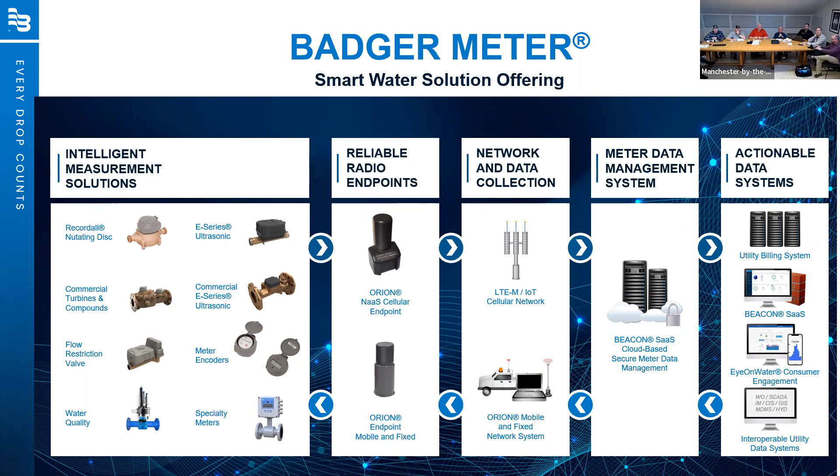Awesome. So we'll run through this really quick. We'll go back through some introductions on what we're talking about, and then show you the actual system, you know, with the customers using it, what it does for them, what it can do for you, and what it does for your residents. So this is kind of a vision of the portfolio of what Badger Meter has to offer. We went through introductions. There's a little lag here.

When it comes to meters, Badger - that's what they started as, a meter manufacturer. They make a very good mechanical meter to this day. It's a nutating disc, low lead bronze meter, largest chamber in the industry, so it's less wear and tear over time. It's our workhorse, we call it. It's been in the field since 1972, and they still make it today.

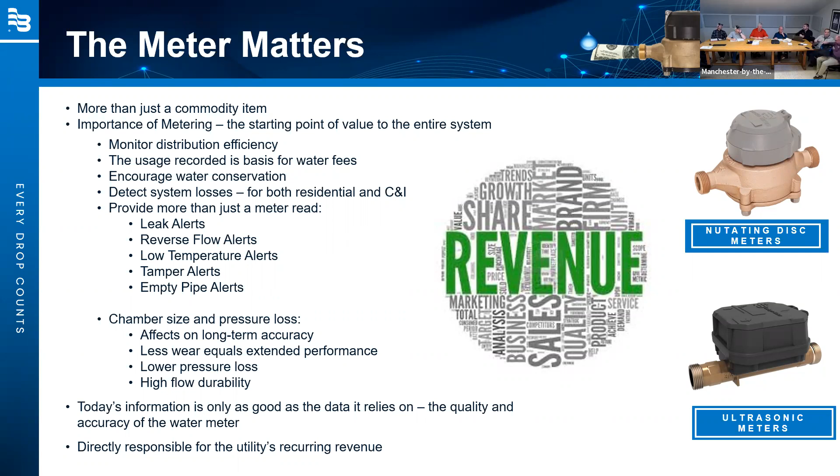You can pass it out if you want. Not a huge deal, but it's oversized chambers, what makes it different from other meters that you may see out there. The big improvements, I guess you should say, that they've made to it is when it comes to the registers that go on top of the meter.

Probably seen something like that in your basement - traditional bronze mechanical meters. So the register that this gentleman here is holding, that's kind of what we've done to bring up that meter to these newer AMI 2023 systems. A lot of customers still like the mechanical meters - you can rebuild them, if they freeze or fail, simply bring in a central meter, very affordable just to rebuild it. The meter itself is affordable and it's very accurate, very robust. But to kind of bring it up to speed with these newer AMI systems to get you different alarms and features, they've added that to the register.

If we put that register on the meter, you'll get a leak detection notification. If there's a leak in someone's home, it'll send a notification through the register. You'll also get a backflow removal alert, so if someone actually takes it off to fill a pool or steal water, it's put back on, it'll alert you of that. It also has a temperature alarm for ambient temperature around the meter register head. If it gets down to 39 degrees, you get an alarm back to the system.

So just taking a few things that we're missing with mechanical meters and introducing it to it. They do make a mechanical register as well, you just won't get the extra bells and whistles. Same price, same cost, just a couple more features. People happen to like mechanical, so we have both options.

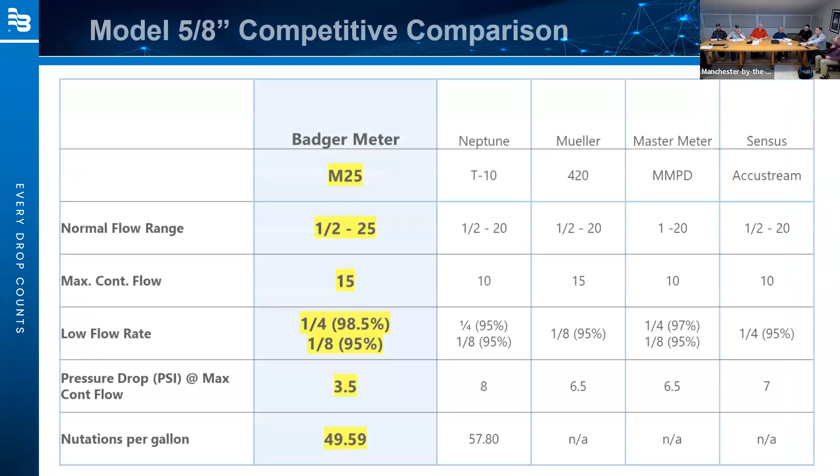I'm skipping ahead, it'll take a minute for it to catch up. I can send this as well so you can see I have all the specs, the low flow capabilities. When you're looking at residential size meters, you worry about that low flow capability. The lower it is when it starts registering water, the better, more revenue for the department and it catches leaks sooner.

Skip ahead. The other style meter we have right here is called the ultrasonic meter. This one was introduced by Badger in 2009 in North America. It's been used for probably 20 years before that overseas in Europe. It's growing in popularity right now, so it's important that we mention it. It's a full line of ultrasonic, from 5/8 inch, your residential sizes, up to 8 inch currently, and it'll go up to 12 inch hopefully by next year.

The difference between the two meters you're looking at is that one has mechanical parts. This one does not, it's using ultrasonic transit time technology to measure the water going through the meter.

Sorry, I'm very naive about it. So how does the bronze one measure water?

That one has a nutating disc inside it, with an actual chamber inside. There's a disc that nutates, or wobbles, around an orb, kind of like a penny spinning on a table. It separates the chamber into two sections, so as one chamber is emptying, the other is filling. It counts the nutations, or wobbles, as the water spins it. On top of it, you'll see it actually moves a magnet, and that's what connects to the register. So there's actually no wires between the register on top and the bronze meter itself, it's just the magnet spinning. The nutations, the wobbling of the disc, tell it exactly how much water is on one side, and it transfers that to the other side.

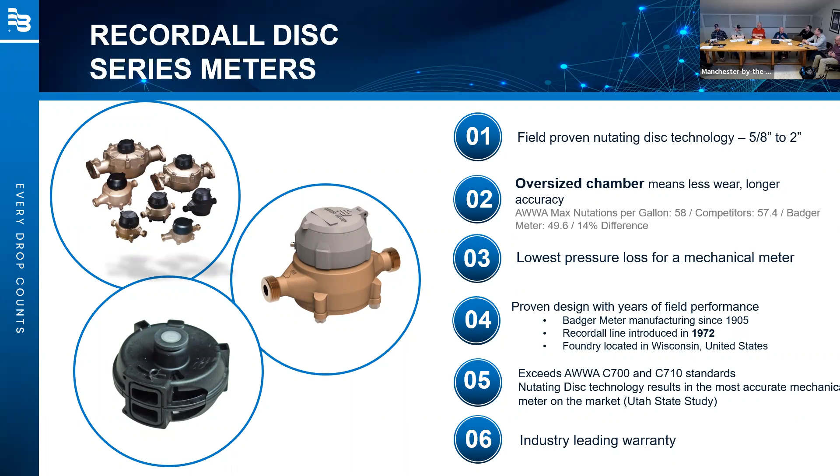You have to factor in also your time—the time of the truck roll to go out there to pull the meter to rebuild it. So a lot of people, if you look at the whole picture, if it freezes, you can rebuild it on site, but do you want to get into a full meter rebuild in 15 years? You probably don't. 20 years, you probably don't. You're probably better off replacing it if you add up all the small expenses.

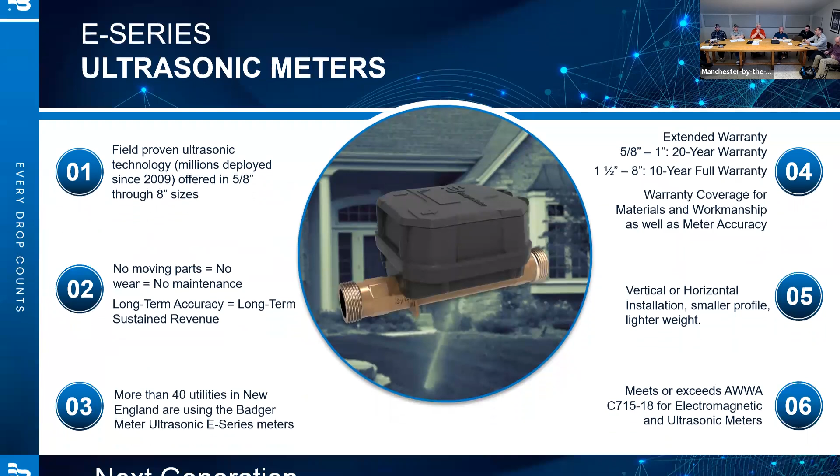The truck's still got to be out there to replace it, or it's really just a plumbing issue. Usually the rebuild comes when it freezes or when there's an issue with the meter or you don't trust the accuracy. In terms of like year 21, when we're going to do another project, you don't see towns going and rebuilding a couple thousand meters. At that point, they're replacing with just a new meter. But between the first year it's in and 20 years, they'll definitely rebuild it as things break, or as debris gets in it and it stops moving, or it freezes.

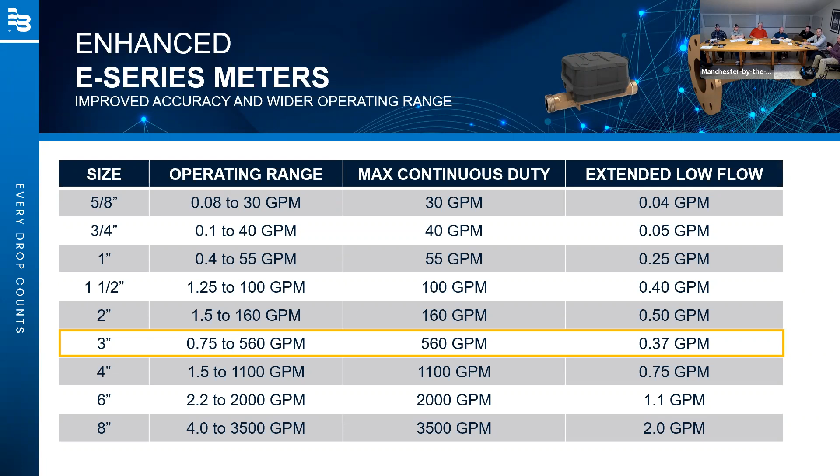Do you guys currently rebuild now? Most towns are going away from rebuild. So the cost to rebuild a meter, when you look at all of it—all in—is typically more than what it would cost to do a replacement. We can give you references of people who have done studies on site, and that's what they find. So it's usually a non-topic once the number comes out.

What I'll do is send you a simple breakdown, pluses and minuses of both meters, as you can see—what you lose, what you gain, that sort of thing.

So the rebuild, that's a high skill level deal—you guys have to do that? No, you can do them in-house. Is that right? Yeah, our guys have done it in the past, but it's not something we typically do.

When one of the meter freezes, meter bases—what you're looking at with the brass, that's just a meter base. That's relatively inexpensive, so at this point, this day and age, if it does freeze, sometimes we'll just replace the chamber, about $20, and put it back out there. But in terms of a full rebuild of like 1,000 of these, at that point they'll just put a new base.

When you say freeze, where are these meters sitting—outside the house or in the basement? Most basements, but you do have people where the heat goes out, or the customer's away, and we had that cold snap a few weeks ago.

I think they replaced about 30 of them. They have a lot of houses that are on pillars and stuff, and the insulation's not great, so the numbers are probably a little higher. We've definitely had further lines in town too, where just something happens and it freezes. And then this slide compares the low flow accuracy.

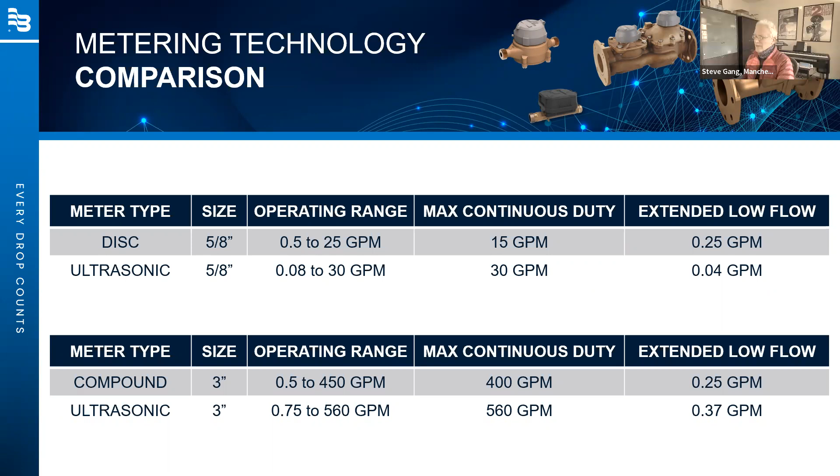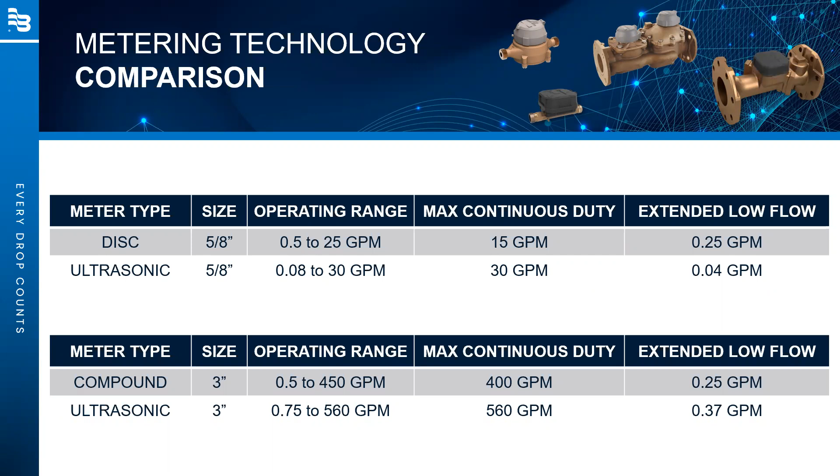Yeah, sorry, Ron Master Giacomo. Just a question on the installation of the meter. Is there a minimum straight run you need on either side of the meter? And is that an issue with installing these? Great question. So ultrasonic does have requirements for the large meters. It's 5 times the diameter of the pipe. So if it's a 3-inch meter, you're going to need 15 inches of straight pipe before and after the meter. The great part about ultrasonic is you don't necessarily need to put a strainer in line because there's nothing that can clog the meter. So a lot of times towns will just pull out the strainer, give them a little bit extra, but yep, it's 3 times or 5 times the diameter of the pipe.

For residential meters, you don't see a need for anything, you can just install them as they are. There's always enough room to do that. Some large meters may have to be replumbed, but typically it's not common. Go ahead, Ron. Are they inside the house or outside the house when they're installed? It would be inside the house. I don't know if you guys have any pit installations, but there are cases where a large meter would be in a pit. So, yep. Places like that, all over.

Are your AMI transponders inside or outside? Usually they're outside. We do have some manual ones. So you're always going to benefit by putting the transponder outside. It's easier for the town to get in and change it later. You don't have to make an appointment. You can walk up and just swap it out.

And going back to what we were talking about before in terms of what towns are choosing these days, they're having us get proposals to look at the cost of each. I would say the majority recently are going with ultrasonic. A lot of legacy customers are sticking with mechanical for the smaller ones, ultrasonic for larger ones. When you say larger, are you saying above 5/8? Or is 3 inches the cutoff, or an inch and a half? Usually inch and a half and larger. I would sometimes start at 1 inch. Yeah.

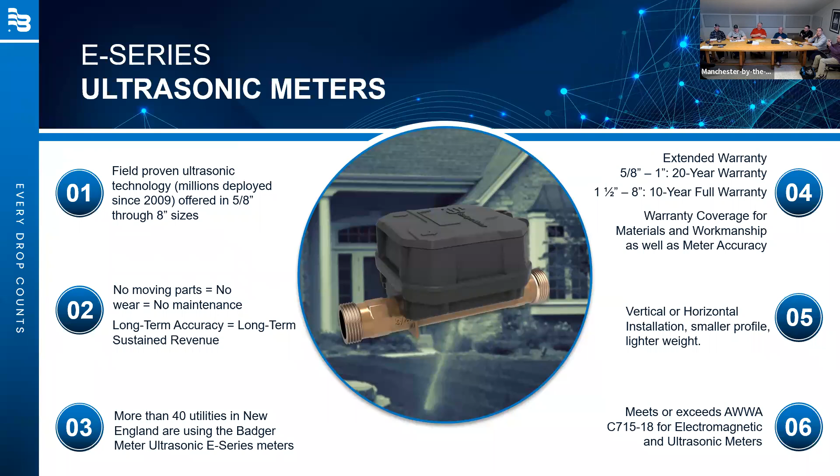Yeah, I just want to make one comment about that compared to one of our competitors: you'll notice the neck just beyond the threads is very robust. I mean, it's solid. I've seen some of our competitors where they actually just have a cover over that and inside the plastic is actually fairly thin. And I've shown up and they've spun it too much. They didn't break the threads. They actually snapped the meter apart. That's not something you're typically going to see with this because it's a lot heavier casting.

And Badger has also recessed the threads on the end pieces about a 1/16 of an inch. They don't go right to the very edge of the meter. So I feel like that helps you walk the meter nut on and get it lined up a little bit better too. Absolutely.

Some benefits that Badger's adding to these meters, just because they've had them out for so long now, 2009 is when they first introduced it. The sampling rate is a big term you'll hear with ultrasonic technology. How fast, how often is it sampling the water? Originally it was once per second, now it's 4 times per second, so it's the fastest on the market. For larger size ultrasonics they are introducing pressure sensors and water temperature sensors to the meter itself. It comes standard 3-inch and above, and it'll be an option on the smaller sizes.

We'll actually measure PSI coming into the house or into the building, which is really cool. Help you detect leaks, not just after the meter, but also what's happening in the distribution system. And being able to measure temperature of the water also will help you detect different abnormalities within the system.

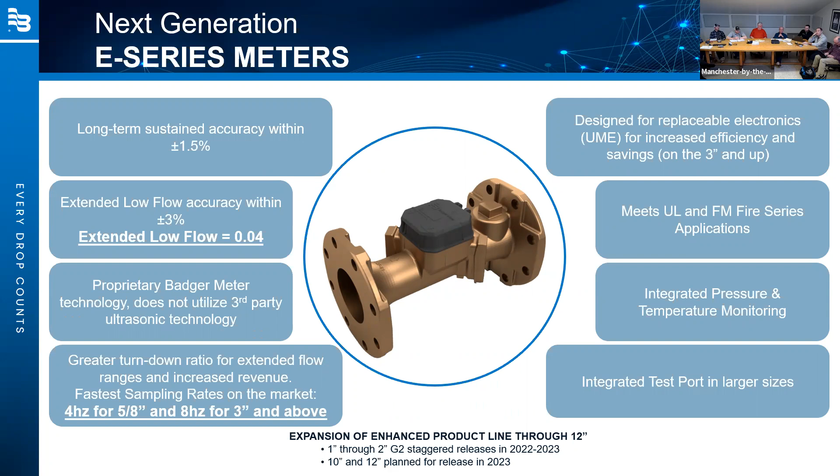Is that like an algorithm that you guys have on the back end, or on your side? So we get an alert? Exactly. It's not like we're running some sort of script. It kind of comes out of the box for any of those meters that have it. They assign their own alerts to it: when pressure's this low, pressure's this high, send an alert. You guys can always change that threshold.

Right. Yeah, there's a default, so you can just plug and play and walk away, and it's like an industry standard, but then you can make adjustments. A lot of people just leave it, if the industry standard setting is pretty good. And I'll show you where it comes to on the software, where it brings that information to you, so you don't have to go looking for it necessarily.

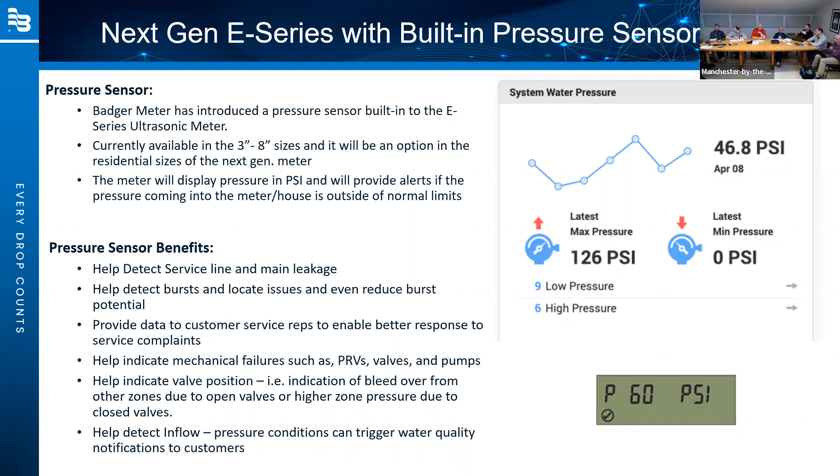We don't have to go over all the specs, but I will put together kind of a one-sheeter: differences, pluses, minuses of both. You were asking about the pluses and minuses. This shows compound next to an ultrasonic 3-inch, shows low flows and high flows. If you look at the extended low flows, it shows the differences for what they can calculate. These numbers are fairly similar. These are pretty much interchangeable for residential application.

The smaller the meter, the lower the water it will detect. So anytime you increase the size of the meter, it's not going to pick up the very low flow. So that's why proper sizing is important to a building.

If you get a big industrial complex, I just had a customer request a 4-inch meter for a UPS facility that was going in because they had a 4-inch line going in. Comes to find out they had 2 bathrooms and a kitchenette. They had a 1-inch meter put in and they have more than enough water. So if they put the 4-inch meter in, they probably wouldn't have picked up that very low flow when they flush the toilet. So you just want to make sure sizing's proper too. That's a big part of it. You guys don't have a ton of commercial though, right?

Yeah, I see the sizing, but disc versus ultrasonic, both of them operate in ranges that are appropriate. Oh, yeah. Absolutely, yeah, AWWA. So that's not a factor in terms of decision. No, the only time it was a factor is for the larger sizes. It used to be what's called a compound and a turbine meter. One was strictly high flow, one was for both low flow and high flow. Ultrasonic replaces that. Takes the question out of it. Hey, we have a 2-inch building going in. A lot of towns now just say put an ultrasonic because they'll cover low to high. Yeah, eliminate all questions.

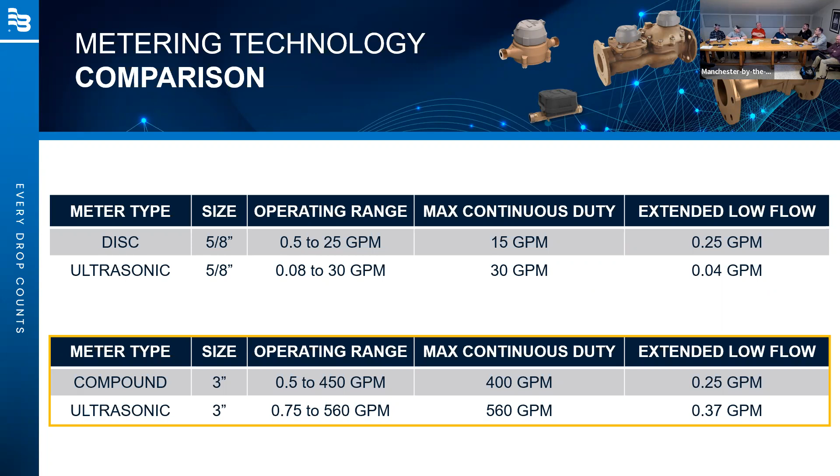And then the other one, the ultrasonic has an empty pipe alarm. So if you actually take the full meter out, they'll have an empty pipe alarm, where I'm not sure of the mechanical. Significance of that, Chuck? You would know. Yeah, I mean, I think if you're talking tamper proof, I guess your ultrasonic is more tamper proof. If you think there's an issue in this town with people tampering, it's one unit, you can't take off the register. I don't think our problem is people jumping the meter that way. Right, that's kind of what I was getting at. We have problems, but those aren't that.

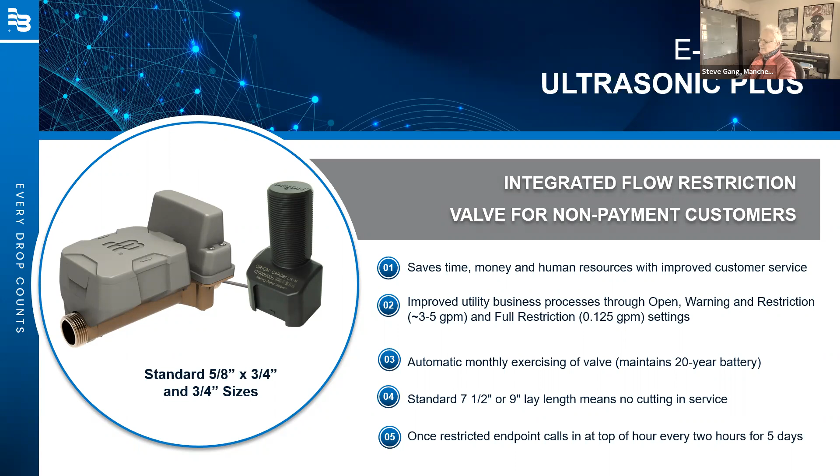You guys do, I think I asked this last time, shut offs for bill payers. Just in terms of time, at what point are you gonna switch over to the infrastructure? Right now. Great, I like it. So that was a wrap up for the meter. It is important. I usually even go quicker than that because I know we're here today mostly for the software and the system itself, but the meters, end of the day, are important as well. And we're fortunate Badger makes some good ones.

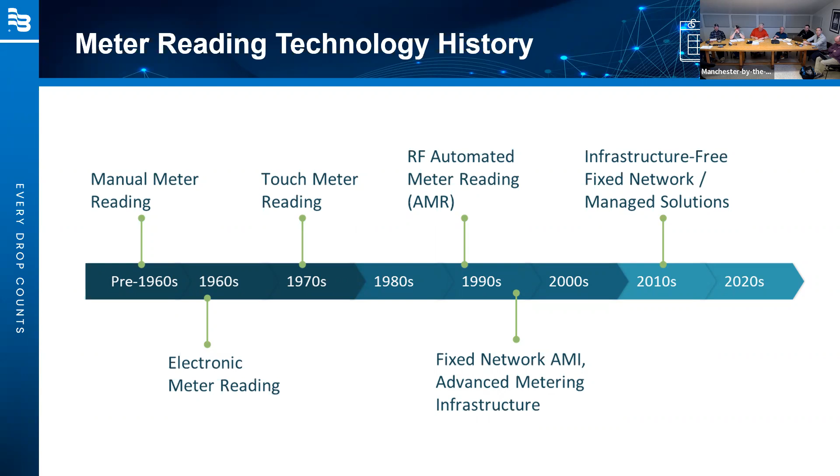So talking about technology, you guys are drive-by currently. Yeah. Probably a couple touch stragglers maybe, but mostly drive-by. That was developed in the 90s, very good technology. It was a way to accurately, efficiently collect a meter read and get a bill out. After that became fixed networks, and now today we're even talking about the technology that came after fixed networks, kind of an infrastructure-free fixed network where the reads are going to come right back to the office without having to drive around. The radio family is called Orion. That's what we'll refer to as our family of radios.

Badger introduced the Orion radio in 2002. A couple of things I like to highlight is the reliability of it, less than 0.5% failure rate on those endpoints. A lot of that is because of the potting. I don't know if you passed around the radio yet, but we talked about field replaceable batteries. These are not. You can see it kind of teases you, but there's this potting material that makes it completely submersible. And we think that's why there's such a low failure rate with them.

Backwards forwards compatibility is huge. So the system that we're presenting is called Beacon. That's what the software itself, the system, is called. Once you have Beacon in place, it can read our oldest drive-by technology, our old fixed network technology, and our newest fixed network technology. So it kind of encompasses everything. So you can feel comfortable that if we put Beacon in today, use it for a system, and in 5, 10, 20 years we want to upgrade to something else, Beacon's gonna be able to handle that other technology.

So we don't leave any assets stranded. You can read the oldest Orion in the system and all the new stuff. So forwards and backwards compatibility is super important. You don't have to ever abandon a system, especially assets in the field. Then we get in trouble.

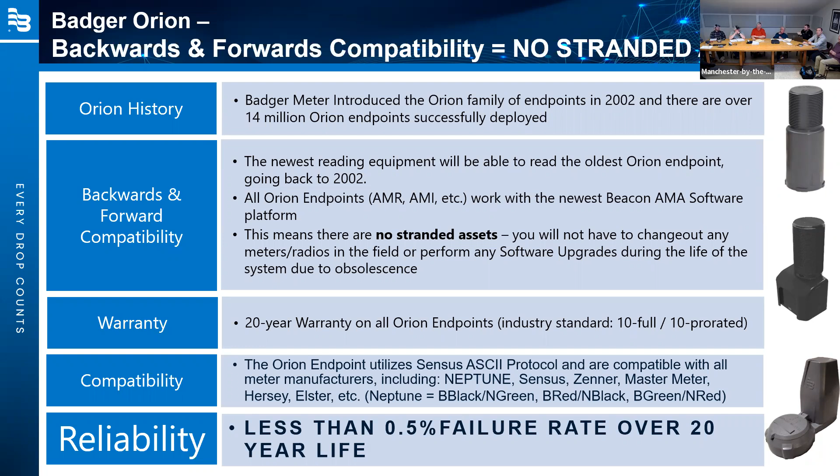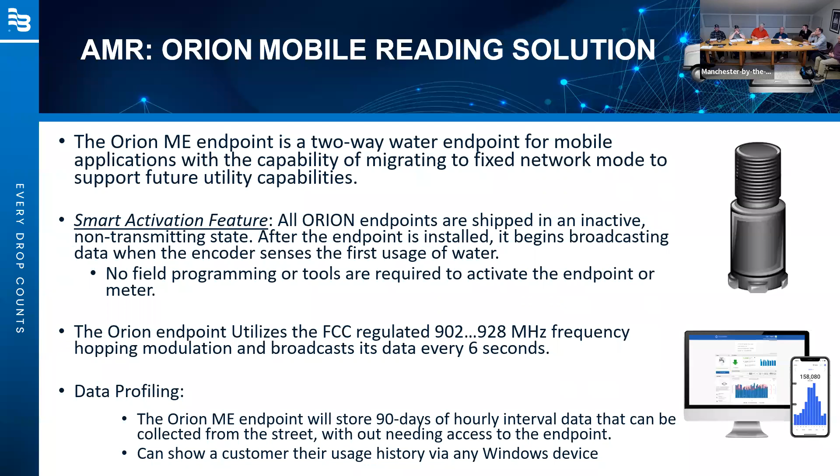And compatibility, our radio that we're talking about is compatible to your existing meters also. So if you do have newer meters in the system, they're probably accurate, no need to replace them and waste the money. They're 100% compatible with that radio system. How does that work? You can go right to the terminal screws, or if the wire's coming out, as long as it's 3 wires, we can just splice it. Since this is red to red, green to green, black to black, it's actually the same.

This is more of our drive-by system. So I'll show this really quickly. I think you guys are looking at going to AMI, not repeating another drive-by system. When towns start to have these conversations, we like to talk about it in this way. AMR, which is drive-by, is reactive. So you drive by, get a read, send a bill out, homeowner calls because the bill is high. You can react, go back, test the meter, try to get some profile and see what happened.

AMI, where the reads come right back to the office, includes a customer portal. You're being proactive now. You're getting that live leak alert. There's high usage at this location. You're getting it, the customer's getting it. You're being a lot more proactive. Yeah.

So traditional fixed networks, the AMI technology that we're talking about, historically you would have to hang up gateways and build a network out in town. So you'd actually have to put up poles if you don't have a high spot, put gateways around your town, and that radio in the basement or outside in the meter pit will communicate to that gateway or antenna and backhaul to the office so the people in the office can open it up and see what's happening. That was the way we did it, late 90s into 2000s.

It never really took off in New England. You won't see a ton of towns who used it because the topography is just crazy. It's really made for a big city where you have a lot of meters in one little area with a high point. Very cost effective, very efficient way to do it. We just don't have that luxury, especially in this area of the state.

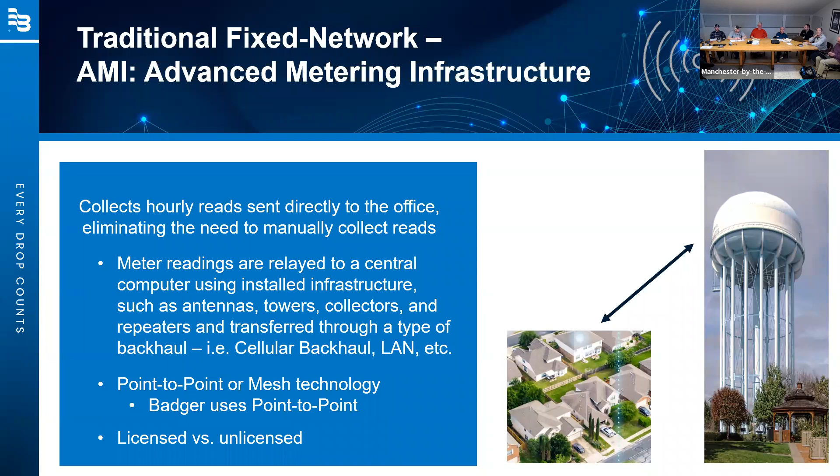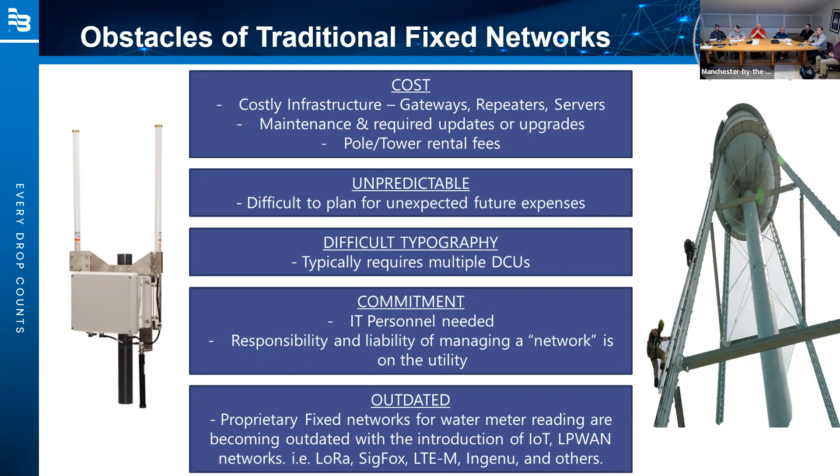It's also a large upfront expense because you have to not just buy the meters, not just buy the radios, but you have to buy the whole network. Usually that's not a town's skill set. You need a big IT department. Like I said, topography requires not just 1 or 2 gateways, all of a sudden you need like 5, 6, or 7 for a small town. So what Badger did back in 2014, so it's been like 7 years now, is they came out with the first infrastructure free fixed network.

They have what's called an Orion cellular endpoint, that radio at the end of the table right there, and it's going to communicate directly to the existing infrastructure of the cellular network. It's communicating off of what they call a machine network, not the consumer network we use for our phones. It's going to call in 4 times a day during the week with all the data off of the meter.

So any meter read, any leak alert, any temperature alert, all those alerts we just talked about, send the information into the cloud-based software system called Beacon. And it'll also have a component called EyeOnWater, which is a customer portal.

So the technology they're using, it's not just your standard cellular technology like we're used to with our phones. That's called the consumer network. This is using what's called the LTE-M. The M stands for machine. Basically, in 2017, there became so many of these little machine devices.

Oh, question? Did you just say 4 times a day it sends back information? Yeah, so it collects 15-minute interval data in the radio itself. It transmits it to the system 4 times per day. So if I had a leak, I wouldn't know it until 6 PM if the leak happened at 1 PM, let's say. Yes, that's a great question.

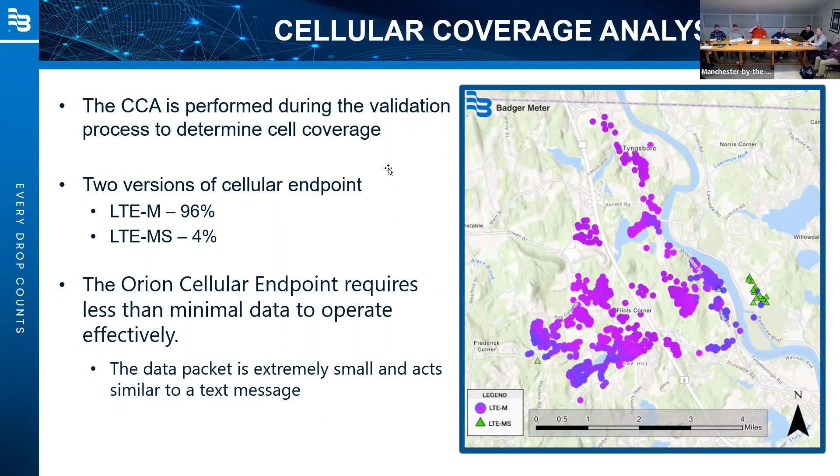So getting into your second question, we did do what's called the cellular coverage analysis. Keep in mind, because we're using a machine network, it doesn't operate the exact same as our phones. Sometimes you send a text message, but you can't make a phone call. We need minimal data like that. So what we did, and I should have put it into the slide, but I didn't, we took the addresses of your meter locations, sent it to the carriers, and they came back and said, all right, here's how it looks. So we'll show you really quick.

The study we did, that's kind of your town with every single address location geocoded. We have 2 carriers that we work with. The primary carrier is the AT&T machine network, and the second carrier, there's no difference, is the Verizon machine network. So usually between the 2, we've had good success in New England. Here's how the coverage came out.

96% AT&T, 4% Verizon. The next step we do, if you want us to, is we actually do a drive test. It's called a field analysis. We have this device that mimics an endpoint, and we drive all the streets where we see mostly the blue and the green triangles. Because what we want to be able to do is provide an Excel spreadsheet with address by address what endpoints are required for optimal coverage.

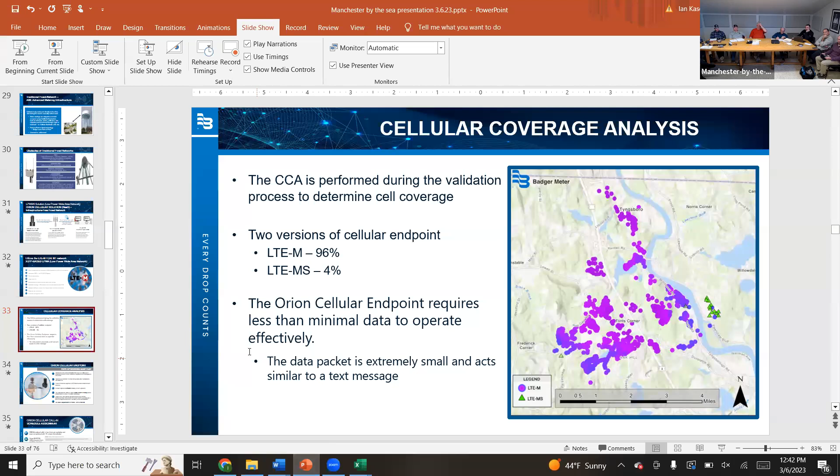I'm going to just breeze through this now so we can show you what the actual software looks like.

The endpoint itself is really quick to harp on. It does provide 15-minute interval information. I'll show you what it looks like in the software.

It's very powerful. There's a 20-year warranty, and when we talk about warranties, it's a prorated warranty - the industry standard on technology. It's 20 years, 10 full, 10 prorated, kind of how it is across the board. But it does have a 20-year warranty on the radio itself and the network.

So the network, let's say year 9, that network that we're raving about changed or tweaked a little bit - it's on Badger to get it working. So it's kind of the only system out there right now with fixed network that covers both the radio and the network itself.

We talked about how it calls in 4 times a day. One thing that's nice on the utility end is you can choose 3 of those call-in times. So obviously it's a huge tool for customer service. You pick what time your day starts. If you usually get a lot of calls at noon time, have them all calling right before noon. If you think there'll be another influx of calls towards the end of the day, have a call in right before the end of the day. It just gives you the most up-to-date information when you start getting customer service calls.

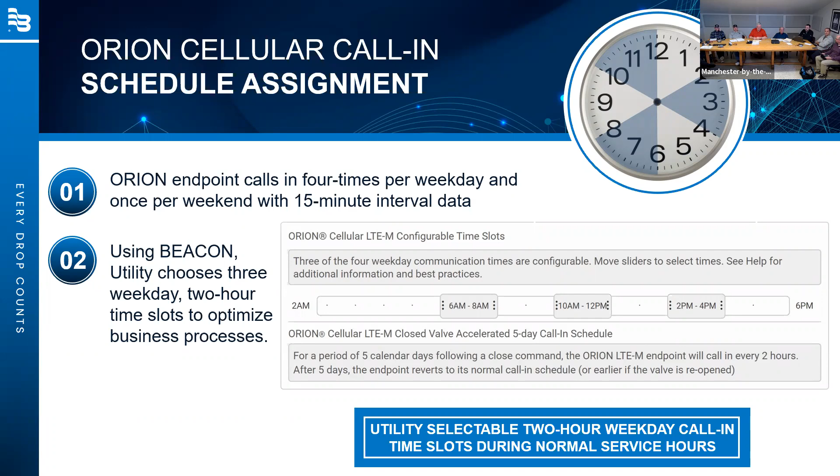We won't worry about how to activate them right now. That's something we can do later.

In terms of the network, we discussed how it's a little different than our normal consumer network. But we want to give you peace of mind that the network's going to be here for a long time. The cellular industry is governed by this 3GPP organization, and the point of that governing body is that you can't just abandon a network.

This body was not around for 3G. It was developed after 3G - a lot of companies and people got burnt by the whole 3G shutdown. If this body was there, they would have said, hey, you can't shut it down yet, you have to do it the right way. So it's kind of peace of mind that carriers can't just run wild and shut off networks and do whatever they want.

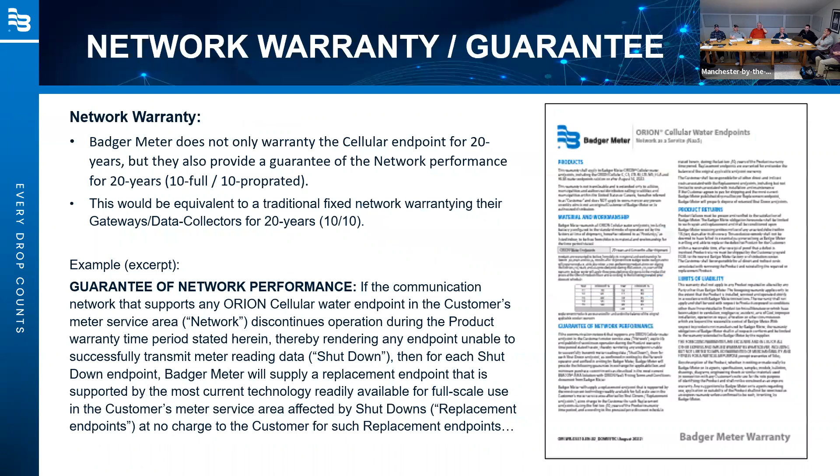The machine network, these little devices don't care about that. They want to be here for 20, 30 years. So they kind of separated those networks. Consumer network you'll see evolve and change, while the machine network will stay steady. Our data packet is the equivalent of a text message when we send it out, so it's very minimal.

System redundancy is huge with fixed networks. You want redundancy, and you're going to have built-in redundancy just because cell phone towers and our endpoints can usually reach up to 5 miles away. So if a cell tower does go down, hopefully there's one within range.

But the mobile backup's pretty important too. It's kind of a peace of mind that if something does happen and we have to go read our meters, you can always drive by and get it. And the radio itself stores 42 days of data, so typically you're not worried about losing something when a hurricane or natural disaster comes through town.

The cell carrier—that's the best part—is that you guys go on with your jobs, getting clean water to your residents, and the cell company will come in and start getting the network back up. If it was your own traditional fixed network where you put up your own gateways, you're responsible for getting those gateways hung and figuring that mess out. This is all done for you, and the endpoint itself stores 42 days. So once it's back online, they'll backfill all that data and history.

So we call it a fixed network made easy. The nice thing with our system is you don't have to do a full change-out. You don't have to invest a ton of money into infrastructure. You can literally start—we have a failing MXU today, we can put one cell radio in and get the benefits 6 hours later. It's a really simple system to deploy.

It's also good for a hybrid approach. Not that you have a lot of large users, but if you did, you can go AMI first with the large ones or the hard-to-reach ones. Everyone else will stay drive-by for a little longer and slowly migrate. It does give you that flexibility.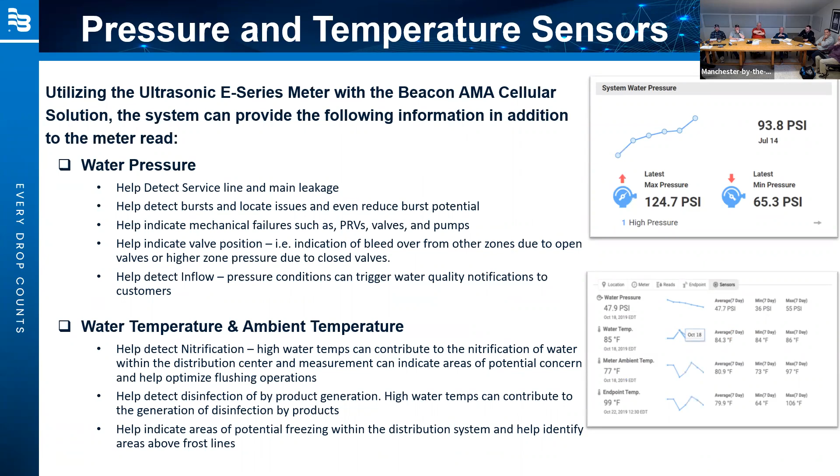More than just a meter read—probably not the time to talk about this, but I can send all the information in terms of water quality and what they're doing with water pressure. But water quality too is really cool. Everything they can start detecting within the distribution system—the treatment guys, Chuck and Nate, can talk circles around me about it. But if that interests you, it's built right into the system, runs right through the same software, so it's really a unique offering.

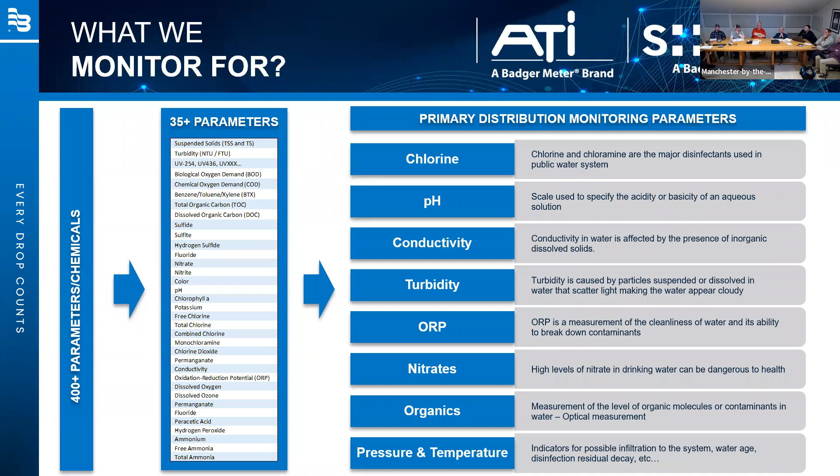So it must be another sensor somewhere. It is—these are the two, pipe::scan through s::can and MetriNet through ATI. You put them throughout the distribution system. MWRA has been using these for a long time. You can put them in the treatment plant itself, but really the benefit you get is when you put them out into distribution.

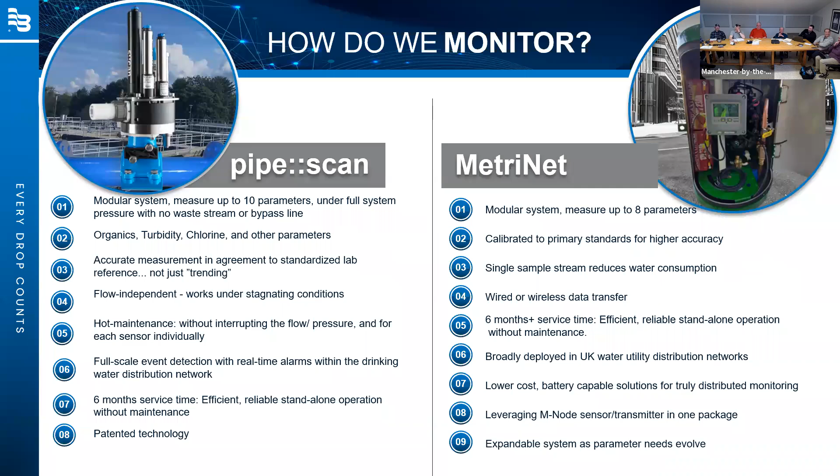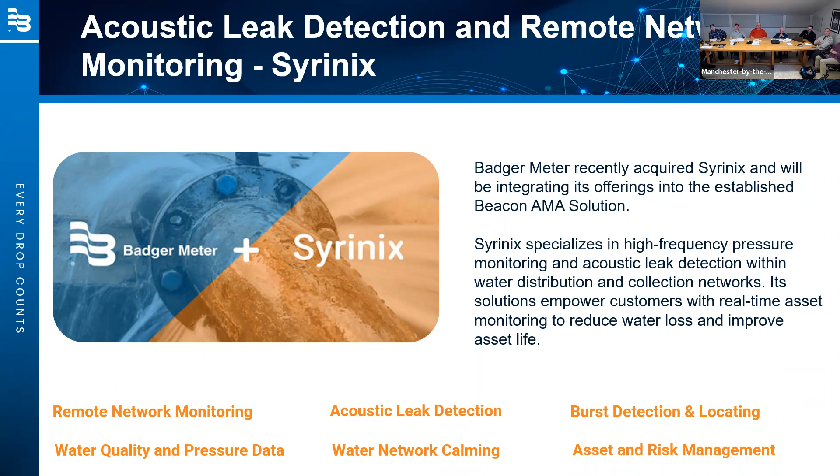Could you show us an example of the consumer portal? It goes on the pipe—it's not direct buried, so it goes in like a meter manhole essentially. Can you guys show us an example of the consumer portal, please? Let's just hop right into the software. We'll show you a customer using it, and we'll show you the portal.

Our software is called Beacon AMA, beaconama.net is the website. It's a cloud-based software, so one person will gain access, but from there the utility can invite whoever they want to have access. You'll all have your unique sign-in and be able to log in and see what's going on. You can even have different levels of access, so you can give it to the whole board to see the utility view, or let them just view it and not touch or change it.

These are all the customers at Stiles Company that use this platform. We have this site because it's for our support guys, so when someone calls we can go right to the town and open it up and see exactly what they're seeing. But I like to go through it to show you it's a proven, built-out system, and these are all New England customers.

Because of security these days, we're not supposed to show you real customers. We have a demo site, but it's garbage, so I'll show you a real customer instead - I got their permission. This is the town of Lexington, Massachusetts. This is actually live meter reading right now in Lexington, exactly what the software looks like. It's a little hard to see from here, but it's what you'll see when you open up your software, as many times as you want per day.

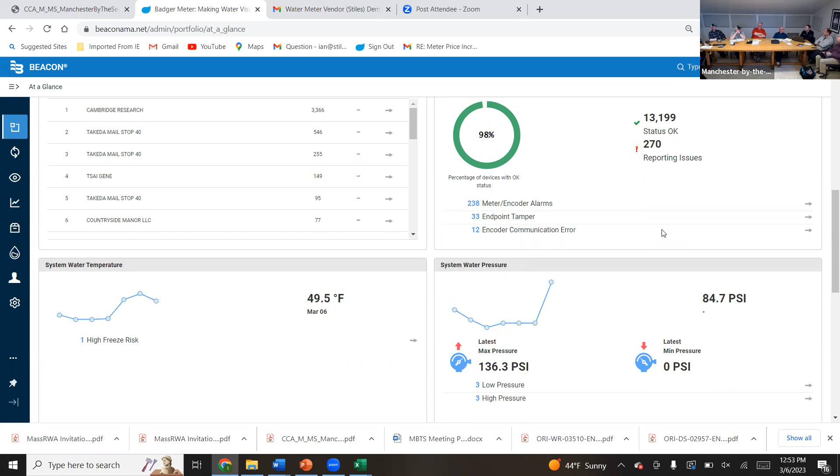So going from quarterly to monthly is like nothing. It's always scary to the billing person. They're like, oh no, I'm gonna do this process more than 4 times a year. But once they see the system and the way it's actually operating, it's super easy. It's as easy as get billing read. You click this last import and click this get billing read, and it writes a file out. That's it. So it is a really simple process, especially if they're all 100% built out.

The system's built out. Top accounts by usage, it organizes it for you. Top 25 accounts. Nice part is, after you have it in for a little bit, it's really your same 25 always. But if 20 jumps up to number 2, there'll be an arrow here and it'll tell you there's probably an issue, so you can actually call that customer and say, hey, something's happening.

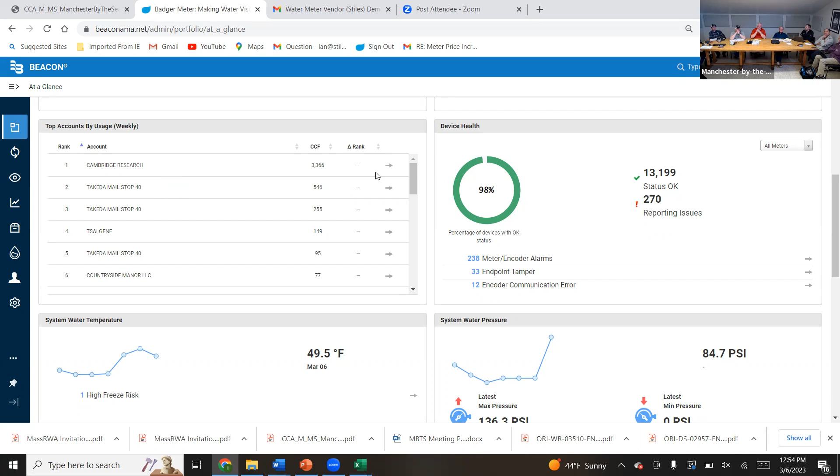System water temperature, we talked about it. These are only for the meters that have it. So we have one right now in Lexington, I should call them, that has a high risk of freezing. They can click on this arrow and see what that one customer is. And here's the pressure. These were all out of the box. I doubt they've changed the thresholds. 3 low pressure, 3 high pressure, and they can click on those and see what's happening with it.

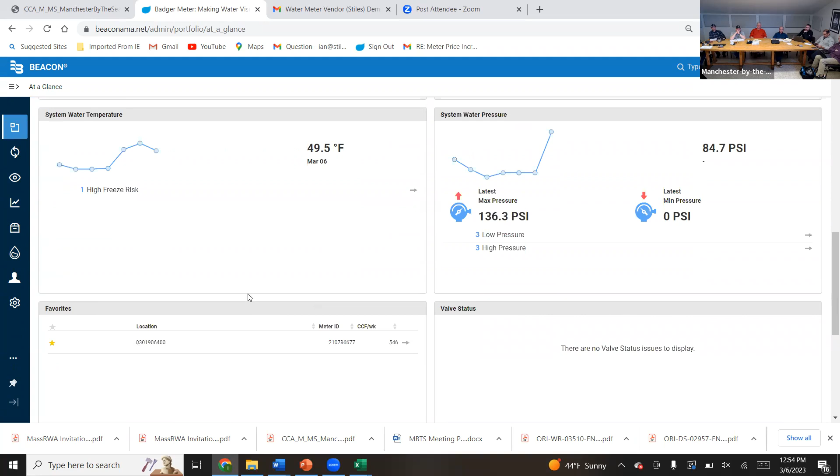Favorites, you choose your favorites. Tech support, that gets you to Milwaukee. Call us instead. And what's coming, what's new. Really quick, I want to show you a leak, and this will kind of bring us right into the customer portal. So I did my homework and just checked. I want to get a good example of a leak for you.

There's 358 of them. But anyone who has access, I don't know if you guys take the customer service calls or if it's Sue, whoever it is, they call in and say, I have a question about what I'm seeing on my usage. Can you help me walk through it? You can search in this search bar, their name, their address, their meter number, it doesn't really matter. So I picked this person, hopefully no one knows them.

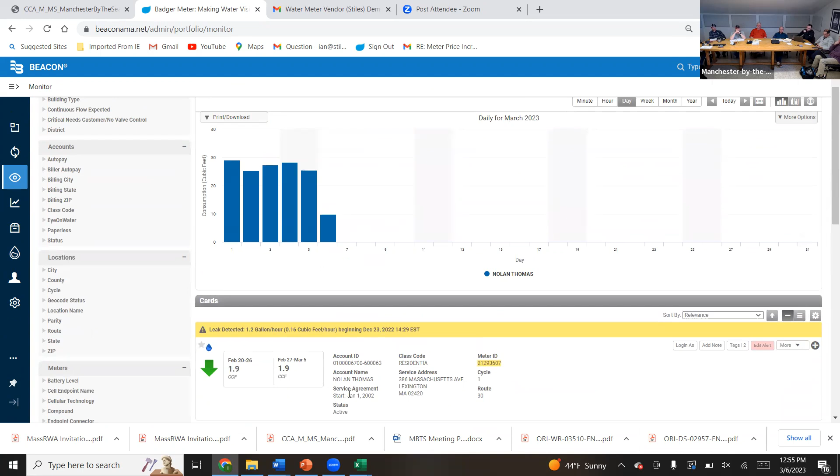If we click this plus sign right here, it'll bring me to what we call an account card. So I can see their location. I can see their meter. It's a 5/8 E-series. They use the ultrasonic residential meter. Click reads. This will show me what their read is. If I'm looking at the meter right now, it's 3 hours old. So this read is 3 hours old, not too bad. If you do closings or need final readings, you can just open it up and get it.

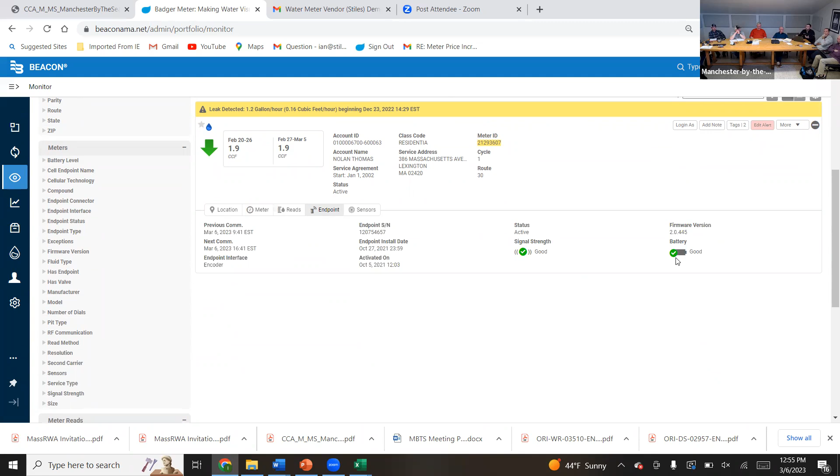Endpoint, that's what we call a radio device or MXU. It'll tell you my signal strength is good, battery life is good. If for some reason battery life was prematurely draining and went to red, it'll pop up on that first page. So it'll bring these alerts and activities to you. But let's go up, we can view the map as a graphical way, so this yellow dot is where the meter is, it tells me there's a small leak. Or you can look at a graph, usually graph is how we like to look at it.

So right now, this is daily in March, up until today, what they used every day. If I go here, click hour. This is today, Monday, shows me every hour from 12 AM up until when it called in last. So let's go back with this arrow and go back to yesterday. So you see how there's blue in every hour of the day? This is a snapshot of yesterday, Sunday, at this customer's house. The system wants to see one of these hours without any blue. This is why we think there's a leak.

12 in the morning, 0.34 cubic feet went through. At 1 in the morning, 0.17 cubic feet went through. You guys cubic feet? We are now, yep. Were you gallons? No, we're not. Okay, all right. Not yet. We put gallons on the bills now. Okay, all right, so I'll remember that.

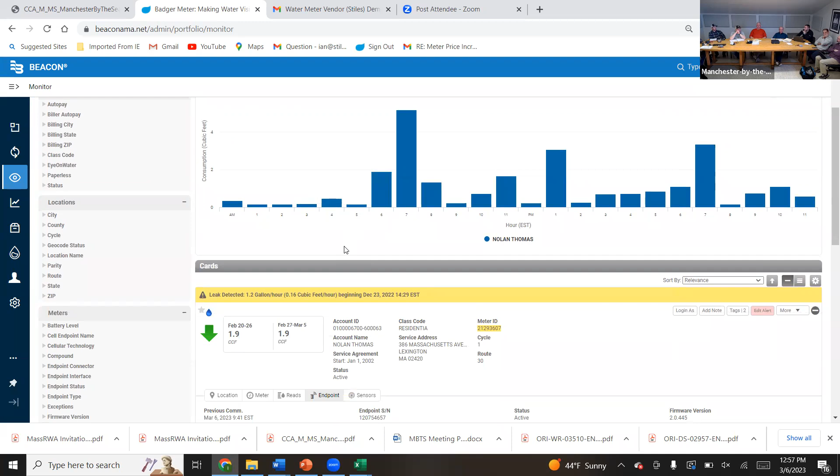Just, it's easier. It's a nice presentation to the customer. We talk in gallons, but they can also toggle back and forth. So you'll see they had a small leak, 0.17. It didn't go below 0.17 cubic feet in an hour the whole day. They probably have a running toilet or something.

If you wanted to, you click on this minute button. Overkill, but you can see every 15 minutes what's going on. Didn't get below 0.04 cubic feet in 15 minutes. They have a slow trickle nonstop. Because it's a small leak, 1.2 gallons per hour is a small leak. Lexington has 14,000 customers. I'm assuming they're not calling this customer to let them know.

So hopefully this person does have a portal. I'll show what that looks like. With this information, you guys can print it out, PDF, email. You have this actions button, new export. You can get everything in an Excel spreadsheet. So if there's abatements or people come into town meetings complaining about their bills, you can build a whole case pretty much and show them absolutely everything.

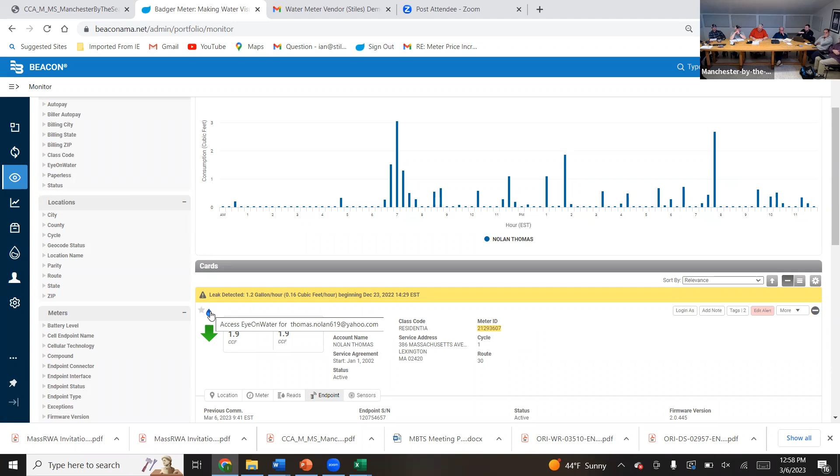But the biggest thing you have now is that sign-up for the portal. This isn't our responsibility. We have a day job of making clean water, too much stuff on our plate. Sign up for that portal and be responsible for yourself. So right here, you see this little raindrop. It means this customer has signed up for the portal. So as a utility, you can click on it and it's going to bring you to their view.

I know the gentleman on the phone asked before what the portal looks like. We have 2 options for the residents for the portal. One is the website view, which is exactly what you're seeing here. The other is a smartphone app. Both are included in our system, no additional charge whatsoever. If you guys want to charge them, that's up to you, but there's no additional charge. They get access day one to the website view of the portal.

It's called EyeOnWater. It's through Badger Meter, it's not a third party, and you get access to the smartphone app. It's hard for me to demo the smartphone app, but if you have Android or iPhone, go to the App Store, put in EyeOnWater, and there's actually a demo site. You can mess around with it. Very similar in terms of the data you're going to see, but it's a little cooler.

They give you a calendar view. They give you good advice on how to conserve water. You put in some information like family of 4, and they'll tell you what you should be using versus what you are using. No public information or anything like that, just helpful tips: fix leaks, this is how much you'll save on your bill.

But you can see it's presented to the customer in gallons. So total 1,087 gallons on this meter. The green arrow just means they used less water this week than last week. Good job. It's all about conservation. And you'll see the leak, 1.2 gallons per hour. Now, you can walk the customer through it on the phone, click by click, and they'll see exactly what you're seeing. They can also look at everything.

If you want to look at the month or the week or the year, you can even do different overlays as a utility, like temperature and rain overlays, and show them, hey, you used so much water because it was much hotter. We just billed out quarterly for the summer. This is why it's such a high bill. Here was the heat. Here's how much water you used. And then tell them to click the edit leak alert.

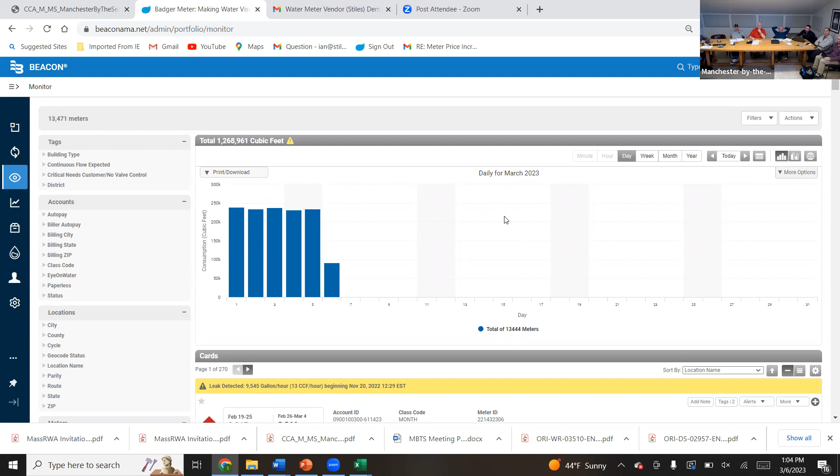Non-revenue water is huge, unaccounted-for water. In the system there's what's called district metering area. You assign your source meters versus your demand, supply versus demand, and it'll monitor your unaccounted-for water for you. So it's a really powerful but simple to use system. I could talk about it for hours.

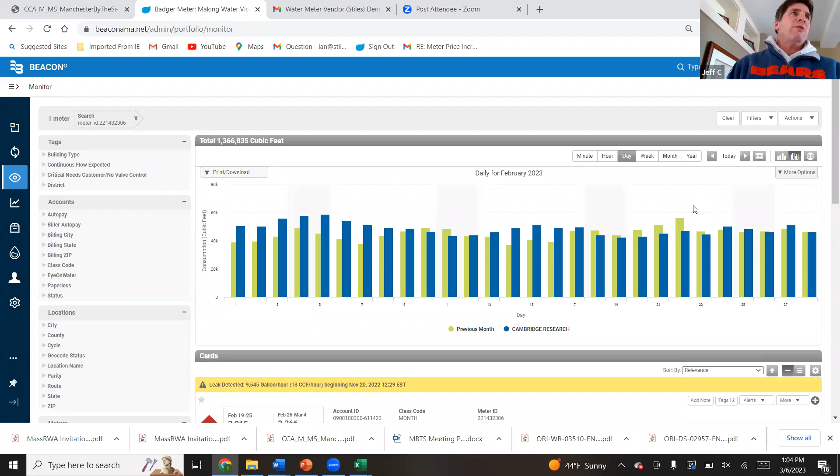Search an account. Can I do that? Type in the meter serial number? Anybody, Chuck, that's on the call have anything they want to ask real quick? I had a question kind of for you, Chuck, and both of them. Is there any ability of this software to tie into the production software? Do some systems do that? Could that be helpful, Chuck? I don't know. I'm doubting that you do that unless we install stuff at the plant.

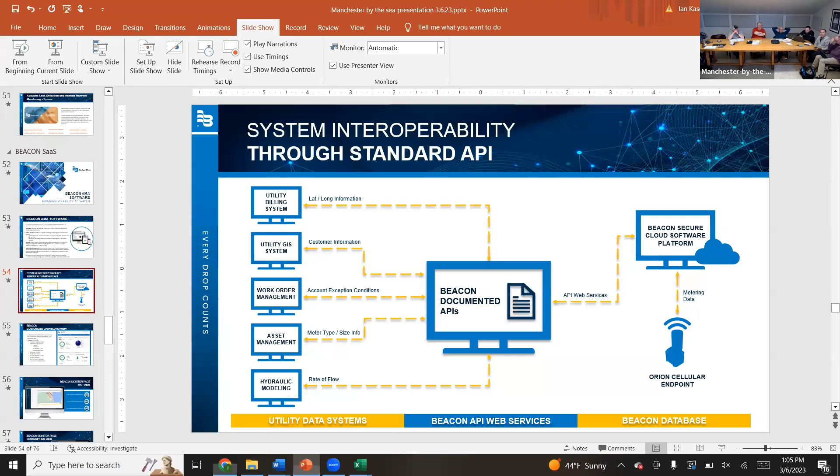Like, I think the question is on the production side at our water plant. It's twofold. So they came out with that district metering area feature, which is huge. Lexington hasn't set it up yet, so I'll show you what it looks like. I don't know if you can see that little graph in there. And ideally, you put a cell endpoint right onto the mag meters, on your source meters.

But what we're learning is that a lot of mag meters don't have the encoder output or the output that we want. They don't have it available. So what we're looking at doing instead, and what we're doing with other communities, is taking your SCADA data, which gives you your production data every day, setting up an API and bringing it into Beacon on a daily basis, so that you can do this feature.

So I think it'd be more helpful if we had something in the system. The SCADA is one thing at the plant. If we can import that, that's fine, but I need a meter that says, okay, going out to this point, on the back end, what are the revenue meters saying about that meter? And that's my district meter area.

Absolutely. And a lot of towns break it down like that too. They'll do it as a whole, not exactly what you said, they'll put a meter in line, the coverage section, and make their own district metering area.

Hey, this is kind of a complicated question. You may not be able to give us an easy answer, but I'm wondering for a system of our size, roughly 2,000 residential meters and then a handful, say 100 commercial meters, what fraction of the cost is the AMI versus the 2,100 meters? Well, I think for this particular system, it's one and the same because you need the MXU and the meter no matter what.

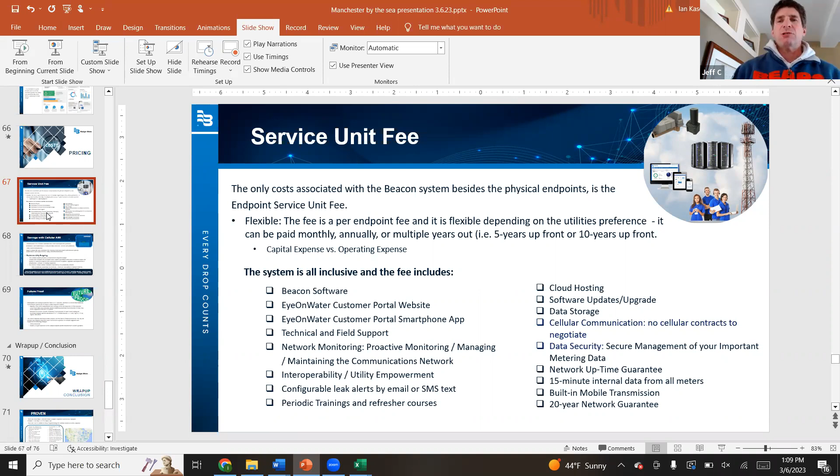Yeah, being all in one system is ideal. You hear complaints from residents, they have the portal, I don't, that sort of thing. Yeah, I understand that. I just meant as far as cost and installation. No, in terms of cost, a little bit, you'll get a savings for bulk per single, a little savings, and obviously what we've seen the past few years, every year costs are going up of goods

and materials. And so right now, the annual cost for a town of our size with 2,000 meters is probably $25,000 a year. It would be under that. It's not hard. I mean, it's 2,000 meters, $1 a month. Go with that, it'll be under that, but go with that. Okay.

And we don't want to shy away from the service unit fee, or try to sneak it under there. That's how it breaks down, but it covers absolutely everything in your system, and it's a fixed fee. So there's no, 5 years from now, you're locked in, we're going to raise that fee, or you're going to have to pay for this. That's encapsulated absolutely everything.

And so you would train somebody in here to be able to work with this software, at least understand how to get around. Ongoing training, so we offer 100% training throughout the life of the system inside the office, for the software and for the field. So if you hire a new meter technician and they need some help in the field, they'll call me, I'll go out with them for the day and show them how to properly do an install.

Ryan or one of the other in-house people will come in to help the billing clerks or anybody as many times as you need. It comes with the deal. No additional cost for that. Okay. I mean, what I can see is there's so much stuff that you can do here. The onus is on us. We've got somebody that all of a sudden has on average several hours every month to figure out, okay, what am I going to do now?

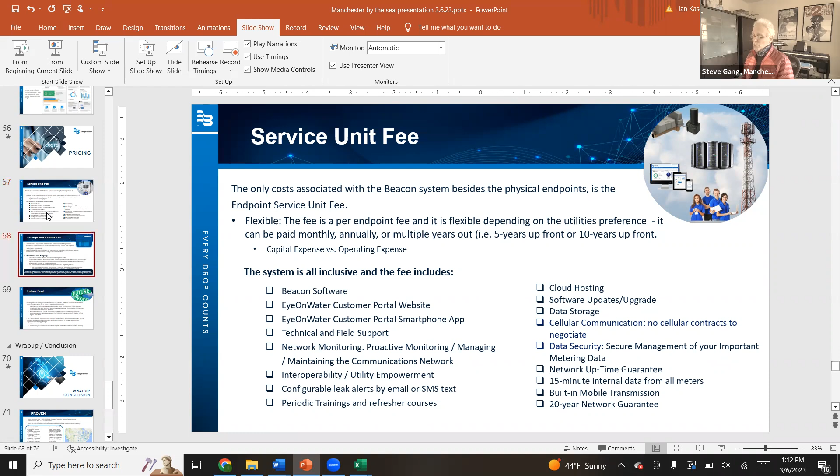Could you replace the battery in that thing? If you wanted to send data 10 times a day, is it easy and cheap to replace the battery, or no? No, it's not replaceable. It's all potted in there for submersible purposes to keep the failure rate low. It does come with plug and play, so you can replace the endpoint. You don't have to cut and splice, just unplug it and plug a new one in, but not the battery itself.

One quick thing on that: more than once a year we release a new endpoint, or there's a new meter with more technology coming out of it. If you're just trying to refurbish an old device, you're gonna be missing out on some of the new technologies as opposed to replacing it. So it's better to look at the future, because there's gonna be better stuff in 10 years. It's gonna overwhelm us how much technology we're gonna have.

We're overwhelmed now. The good part is the replacement cost for just the endpoint is the same as the MXU, it's like $120, whatever it is.

It can be overwhelming, the system itself is very complex, but the software is super user friendly. I've had my 9-year-old daughter go on and search an account. It's very easy to pull off. But it does so much. So as you learn it and use the basic stuff, as time goes on you can incorporate some of the extra features as you feel comfortable.